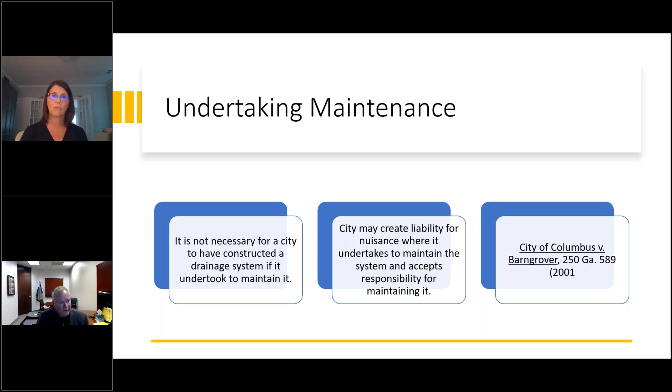Undertaking maintenance, it is not necessary for a city to have constructed a drainage system if it undertook to maintain it. So again, if they don't necessarily have the project, but they have said they will maintain it, then that's the liability. The city may create liability for nuisance where it undertakes to maintain the system and accepts responsibility for maintaining it. And I'm not going to go through that.

So from a county perspective, damages against a county - counties are generally not liable for nuisance. Counties can be held liable for nuisance only under the constitutional and eminent domain provision against taking or damaging private property for public purposes without adequate and just compensation. Counties may be liable for damages if it creates a condition such as nuisance that amounts to inverse condemnation.

Plaintiffs may recover only if it amounts to taking property without just compensation. Measures of damages, and I'm not going to go through the rest of that.

Damages against the city, again, we kind of really covered those specifically, but special damages for recovery of rental or market value of property are available. Damages are also available - unlawful interference with the rights of the owner to enjoy possession of the property may be an element of the damages. The measure of damages for discomfort, loss of peace of mind, unhappiness, and annoyance of the plaintiff caused by the maintenance of a nuisance is for the enlightened conscience of the jury.

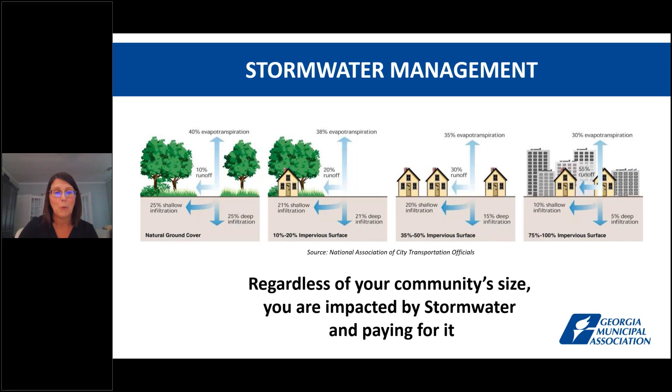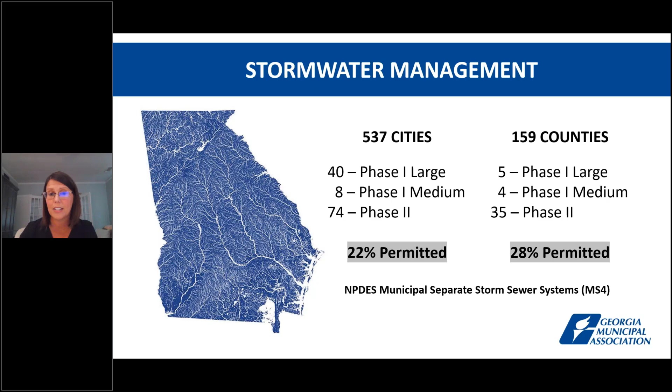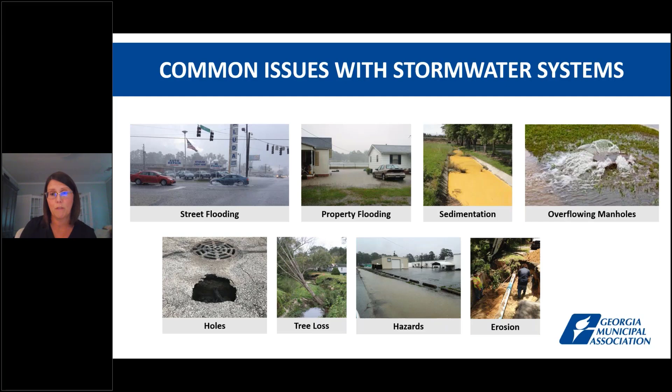So every single one of these things you can find in any community, regardless of your size. But we have to kind of look at it and see what is causing some of these issues so we can address them and they don't become more of the norm and just what we have to accept. So we have to ask ourselves why.

When you look at the whys of what's happening in the stormwater, so much of it does come back to undersized systems. They were built decades ago. We've seen increases in development prior to regulations. You've got properties that were built prior to flood maps. So we have properties now that are flooding that are in the 100-year flood zone, but back when they built in the 40s or 50s, there was no flood map.

We often see with that erosion and sedimentation, when you see this coming into the streets and waterways, a lot of it ties back into the inadequate erosion and sedimentation best management practices. While larger developments do require plan review and all that kind of stuff, sometimes people aren't keeping those BMPs up to date. Sometimes something falls down, or they didn't do something, or somebody's not staying on it. And when we don't control that and facilitate oversight of those who are doing it, making sure they're keeping them up, then we can cause these other issues.

That manhole that's overflowing, typically that's what we know as I&I, which is inflow and infiltration. This is where water from any source other than wastewater is getting into the sewer system and oversaturating it. We don't like to see those things, but especially in major rain events, you will see this happen. And this is why it's so important that we're doing inspections and tracking to make sure that we're not increasing the amount of inflow and infiltration that's happening.

Those sinkholes that we talked about and saw that picture of a little bit ago, lots of times that just refers back to leaking joints or a leaking box. That's where your pipes come together and they separate, so that's a leaking joint. If water is coming through the ground, it will start to suck in those areas, and then you do start to have those voids, which pops up those holes. Same thing with the pipe that's coming into the box. If that seal is not solid, then you will start having water coming through, because those things get overfilled really quickly too. So it's just pulling out what it can, and if it's a weak point, that's where it's going to go.

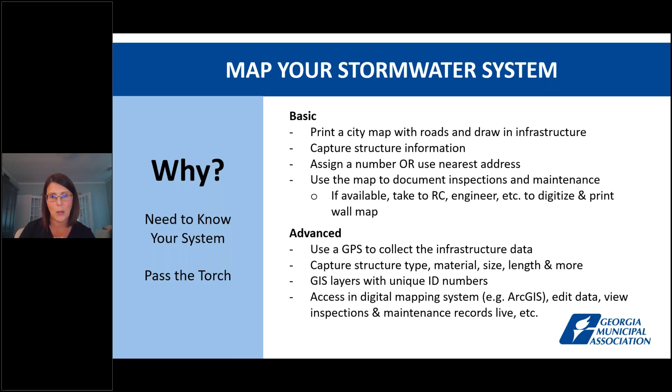So I'm going to jump into Valdosta and what we did. Initially when I started, we literally had yellow notepads and a coffee can full of sharpened pencils. That is how our guys were tracking what they were doing with stormwater. We'd had a stormwater program for years. It actually started in public works, moved to utilities in '97, and then we moved over to engineering. But when I first got there, that's literally what we had, the notepads.

Now I had a computer, so it was really different, but my staff didn't have computers - just a desk and the notepads and pencils. We worked our way to a basic system, literally a map book, and then fully into the advanced system where everybody's using GIS from a digital perspective now. So we're going to walk you through each of those.

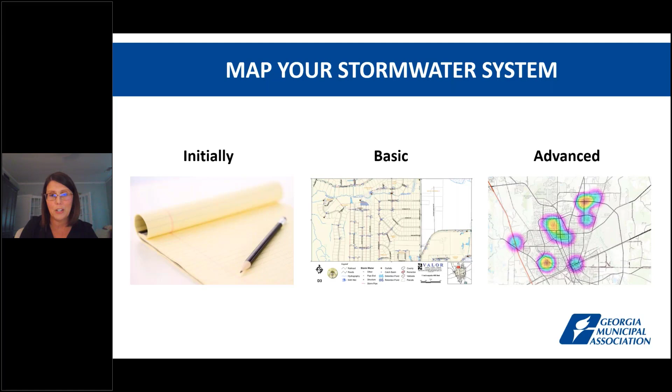Going from paper to the paper map, I cannot say enough about the South Georgia Regional Commission. We worked with them and they allowed us to use one of their GPS units, so we were able to go out and GPS all of our infrastructure because we knew it best versus having one of their staff who didn't know it as well. So we GPSed everything.

They actually did all the post-processing for us, which is where they make corrections. Even though you're using a GPS, depending on satellites and cloud coverage, you may end up having a storm pipe here and a catch basin right here, but the two should be connected. They can help create and correct that data for you.

And then of course they had servers, so they maintained all of our data, which was really great for us because them having our data also allowed us access to the rest of the county as well as the region. So we were able to incorporate a lot of different data shapefiles.

I've put a link there if you guys want to check out the VALOR GIS - it's a joint effort, so both the city and county pay a significant amount of money to have GIS services. Even though a lot of the work is done by city or county staff, we have a fantastic relationship with them in terms of that data and how we use it, and being able to work with them for anything we have GIS for - water, sewer, historic preservation, parks, roads, curbs, you name it. We have so many different things mapped out, tied back into that system, and it's a great place to check out.

So once we got everything mapped out, we realized we needed to utilize this data. There was one stormwater employee that had a computer and GIS software, which was me. At that time I actually had ArcMap, so I was able to do my own data corrections and creations. But we had zero employees in the operation and maintenance department with access to it - they had notepads and no computers, so they weren't even able to access it.

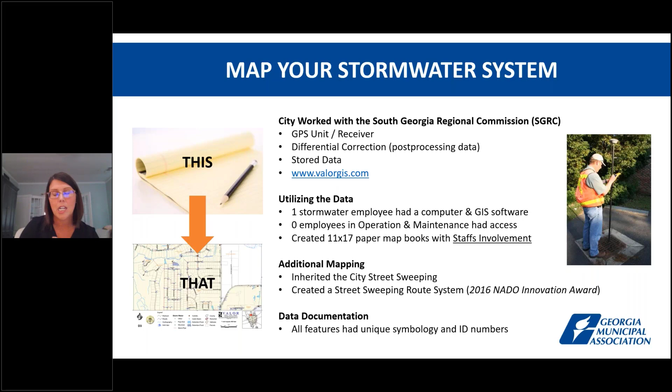So from that, here we are still doing a lot of paperwork, which was better because we didn't really have a ton of great paperwork before. What we found is the more actively involved our staff were, they continuously moved towards advancement. They really took ownership, and they are the reasons we were able to go from that paper map book into actual movement into a digital realm with computers and stuff like that.

We transitioned into that really at their desire, because more paperwork meant more documentation, which is great, but that paperwork we were then converting into Excel, so it could be done into GIS, and I was the one taking all that data. I felt like a glorified intern trying to document all this information so we could get it into GIS, which was really important, but they needed me doing other things, not just that.

But my guys couldn't do it because they didn't have computers. So that's when we purchased a couple of computers and some free versions of ArcView, and we worked with our regional commission on this too, so the guys could then see the data just like I could. They just couldn't edit it. And of course, this resulted in us creating more forms, more data, and that was also becoming less time in the field.

So this is when we transferred to laptops and tablets. We really wanted to empower our staff to have the information that they needed.

So they lost those big, bulky map books, they moved to tablets, and they were able to see everything that I was right there. And then, of course, that also allowed them to start doing all their documentation through the apps that we had on there.

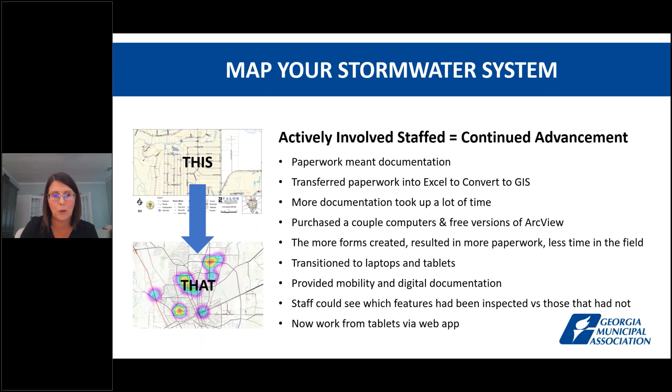So when you go from getting all your data mapped out, which is so important, this is where you can start customizing some of your stormwater procedures. This is where we wanted to really look at how do we do this and why do we do it. The important thing for us is a lot of things we did was really dictated by that NPDES permit that we had.

But we thought, instead of overcomplicating this, let's strip it down. Let's make it as easy a process as we can, but get that information that EPD needs, and make sure it's something we can continuously manage.

So this is why we did it - to formalize our process, because I think we all know people are coming and going, and lately at much more rapid speed than before. But we want to make sure that we had a consistent routine, that people knew what to do, that target wasn't constantly moving with them.

We wanted to be providing regular operation and maintenance because we wanted to be proactive versus reactive, because that's really where we were at. And then we needed that documentation, not just for claims, but also so we could track everything, so we knew we were getting eyes on everything.

At the end of the day, probably every month we were getting some kind of claim request or something that didn't turn in, and then we were having to provide documentation. But we had that history - we had all that history of where we had done inspections and repairs. Lots of times when people say we never did anything, we were able to prove that we had, and actually much more than they had even thought.

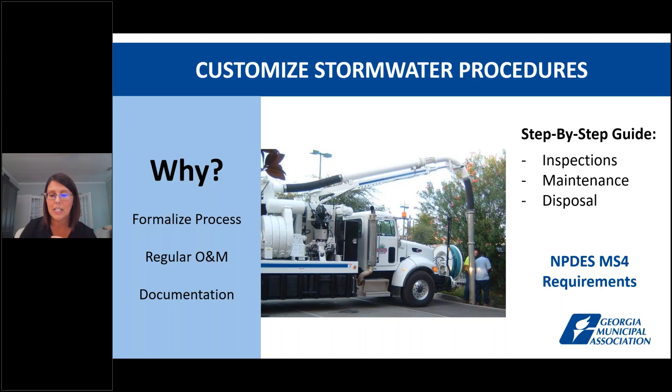So we're going to talk a little bit about that step-by-step guide - looking at inspections, maintenance, and disposal. I know you can't see this on here, so we can certainly send this back out, but what we did is we created a simple 2-page form that really provided the layout of how somebody was supposed to inspect our MS4. It goes over inspections, maintenance, and waste disposal.

So if you're like us, lots of times we were digging stuff up and just putting it on the yard and we'd use it later. Well, they actually can consider that to be polluted because of the oils and hydrocarbons and stuff getting into the soil. So we had to be very clear in terms of how we were doing inspections.

That's what I liked about this simple section - every year they knew they had to do a minimum amount. For example, with our catch basins, we had over 6,000. They knew every year we had to do 20% of those. So every month they got a goal - we would just divide out that 20% number by 12.

We all know there's certain times where it's a little more challenging to get out there to do inspections, especially when that grass is growing really, really high and you're constantly having to cut. So in the winter months and early fall we were actually doing a lot of inspections there - heavy in the front and heavy in the end. But that allowed us to know what our number was, and we didn't get behind.

And I'm happy to say that instead of doing that every 5 years, we were actually got to where we were doing it about every 3. So that just meant we were able to inspect our entire system and do any kind of maintenance that was needed.

But it gave us that framework of what the expectations were and how to do it. With each of these, we actually did create forms so that we could document whether it's the catch basin inspections, the ditches, the ponds, the outfalls. And most of the information was easy, you literally could circle it, because we didn't want our guys getting bogged down having to complete a 10-page form for stuff that was really simple.

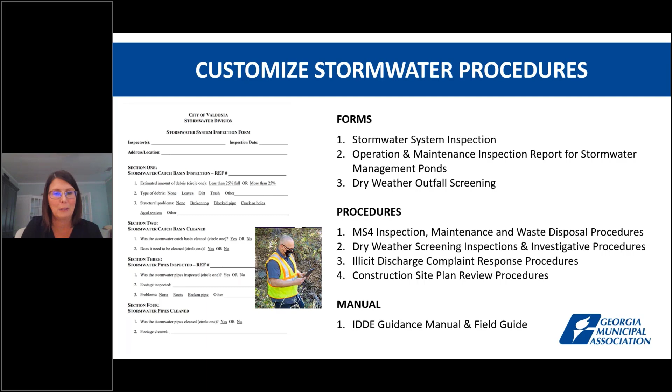These are just a couple of examples. When you look at doing those inspections, this is where we got eyes on our system and found stuff that was just not working. So this is where we did the inspections, created those work orders, made repairs, and this is where it's helping to reduce some of our risk.

Again, one of those things, that was a major thoroughfare. And this also triggered me to go look at GIS and see how many more corrugated metal pipes we had that went under roads, which there was a significant number. That became a priority for me to start replacing, because the more I can remove the risk ahead of time, the less risk I've got going forward.

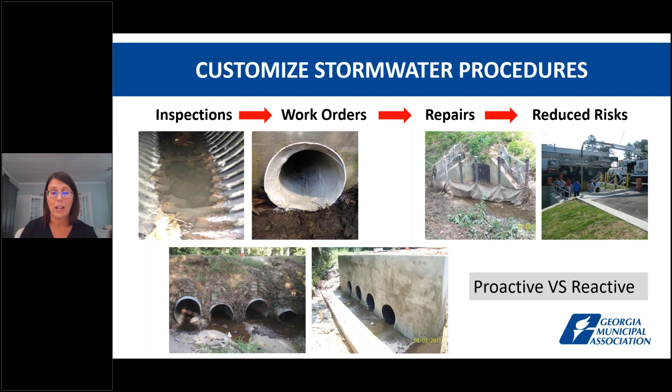Looking at all this, what I learned is the more inspections we were doing, the more repairs we were making, this was really taking us from being reactive to proactive. Before we were just kind of out doing our thing. In cases where we didn't have that mapping, our staff didn't always know where city limits was. We were actually working on property that was outside city limits, and sometimes private, because every time something got annexed in or rezoned, it went through planning and zoning and didn't make it to Stormwater. So by having the system mapped out and doing these regular inspections and maintenance, this allowed us to move from that reactive standpoint to a much more proactive one.

When you're looking at it, I really cannot stress enough about knowing your internal resources. My background was environmental planning before I moved into O&M, and I learned so much being out there in the field seeing what my guys were doing and learning their skill sets. I found I had a guy who did great masonry work, and we had contracted somebody else to do our head walls who wasn't even doing a great job. But when we found what people's gifts were, it was really a blessing for us. And knowing your equipment and technology, we couldn't have done some of the things we do now without that. At the end of the day, you've got to look at what your level of service is. Don't overcommit on what you're going to do, but you've got to have a level of service identified, because if you don't, you're just going to be reactive, going in basically a circle.